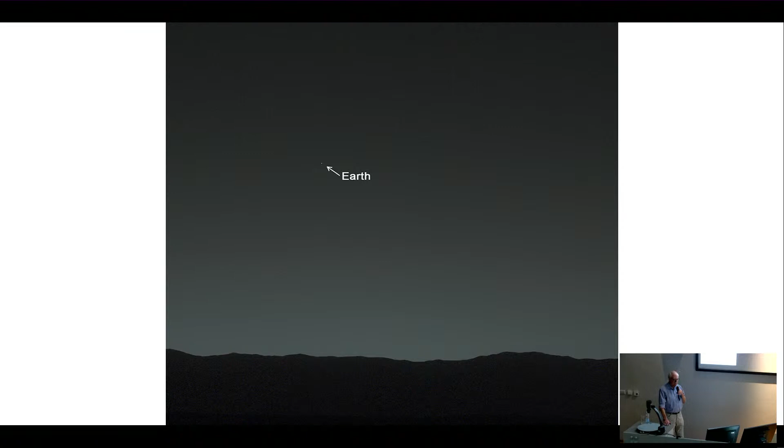We've discovered more than 5,000 exoplanets so far in different parts of the Milky Way. The nearest planetary system is 4 or 5 light years away, Proxima Centauri, and even if it had a habitable planet, we would never be able to get there except in several hundred years' time, because we simply don't have the ability to travel quickly enough. So we are absolutely alone, and if we mess up this planet and screw up its ecology, we have only ourselves to blame.

The last big climate crisis was the Ice Age, from about 115,000 to 11,700 BC, when the Earth cooled significantly, for reasons which aren't clearly known at this point. The general feeling is that it had something to do with a sudden release of carbon dioxide, which in fact had a contrary effect at that time in cooling the climate rather than heating it up. But the average global temperature during the Ice Age was about 8 degrees centigrade. Sea levels were 120 meters lower than today, which is a very difficult thing to conceive of, below the present average sea level.

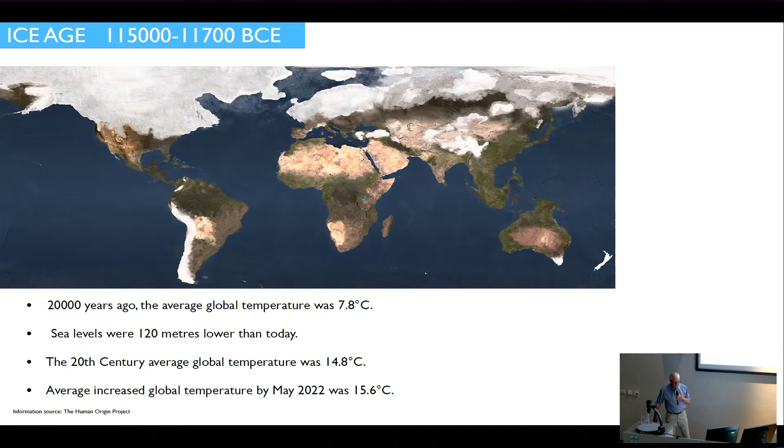The 20th century average global temperature was about 15 degrees centigrade, and average global temperature by May 2022 had climbed to 15.6 degrees centigrade. So if you look at the deltas between 14.8 and 15.6, and the 7.8 degree average temperature during the Ice Age, we are on track, I think, to disturbing the Earth's climate, if we carry on, to the sort of degree that will produce the kind of cataclysmic results that the Ice Age did, but with temperatures on the rise rather than on the fall. So the next climate crisis really is the one that we're faced with now.

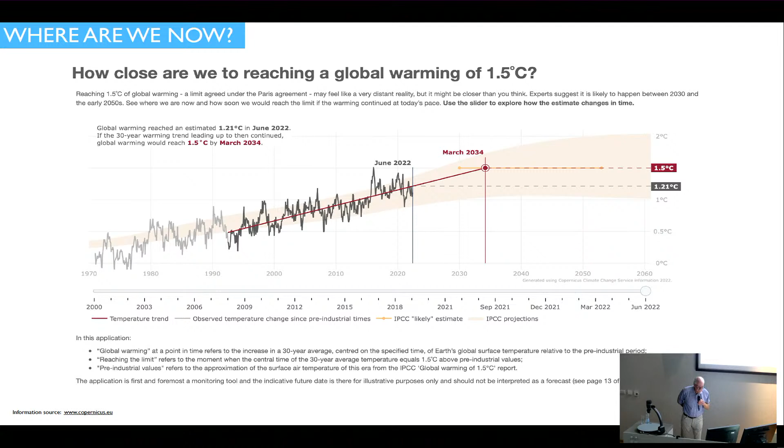How close are we to reaching the magic figure of 1.5 degrees centigrade, the apocalyptic figure? Well, in June this year, we had an average global temperature rise of 1.21 degrees centigrade, and the red line is 1.5, and we're creeping up each year. The prediction now is that as things stand, March 2034 is going to be the date that we reach that point.

Now, the program for dealing with this at a global level is being handled through the United Nations, the so-called COP conferences, and at the COP conference in Glasgow last year, around 200 nations signed up to increased climate action and greenhouse gas reduction targets, which followed the Paris Agreement of 2015, the world's first comprehensive climate consensus in which 195 nations agreed to take action. The Paris target was to hold the temperature rise to well below 2 degrees and preferably stop it at a 1.5 rise. Coal, the worst cause of global warming, is to be phased down rather than phased out, with the language weakened by India and no timeline given.

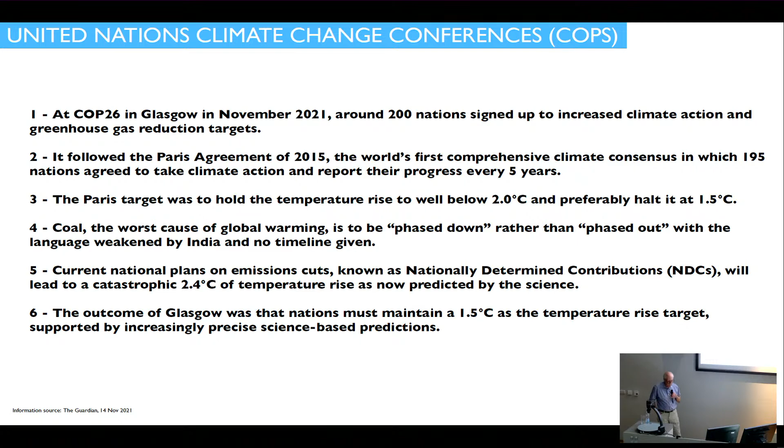Current national plans on emission cuts, known as nationally determined contributions, will lead to a catastrophic 2.4 degrees centigrade rise, as predicted now by the science. So the outcome was that nations must work towards the 1.5 degrees centigrade target. And the next COP takes place in Egypt, I think, next month. And so we'll see what happens there. So that's basically the situation.

What is the evidence for global warming and climate change? What is the evidence for sea level rises?

Well, this slide was taken by satellite about 10, 12 years ago, and first started getting me interested in the whole issue of sea level rises. And this shows part of the Ross Ice Shelf in Antarctica that broke away in 2000 to form the world's largest iceberg, which was 295 kilometers long by 37 kilometers wide and bigger than the island of Jamaica.

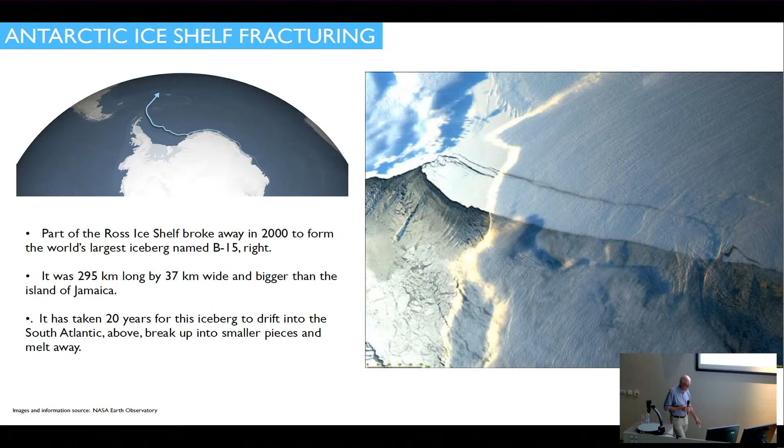And I thought to myself when I saw this photograph, my God, this is an incredibly serious situation that is beginning to take place, and nobody's paying much attention. So it took 20 years for this iceberg to drift into the South Atlantic, as you can see on the slide on the left here, up there, where it eventually broke up and melted into smaller pieces.

So these two photographs were taken in January and March this year, and they show a section of ice shelf in East Antarctica disintegrating. Those photos are roughly 110 kilometers across from side to side. And you can see here how this whole area of shelf has just disintegrated here too, and around here, breaking up into icebergs and ice floes and floating off into the Atlantic, and up here too. So in the space of just 2 to 3 months, that had happened earlier this year.

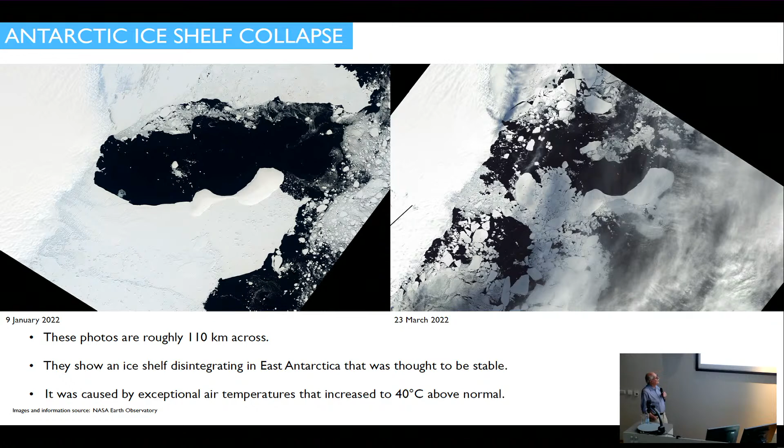It was caused by exceptional air temperatures that increased to 40 degrees above normal, and that was for Antarctica. A paper published in the magazine Nature in September 2020 points out that half the Earth's fresh water is contained in the Antarctic ice sheet. This represents the largest potential source for global sea level rise under future warming conditions.

The paper concludes that if the Paris Agreement to limit global warming to well below 2 degrees above pre-industrial temperatures is not met, critical melting thresholds may be crossed in Antarctica that may result in, quote, long-term, possibly irreversible sea level rise of up to dozens of meters.

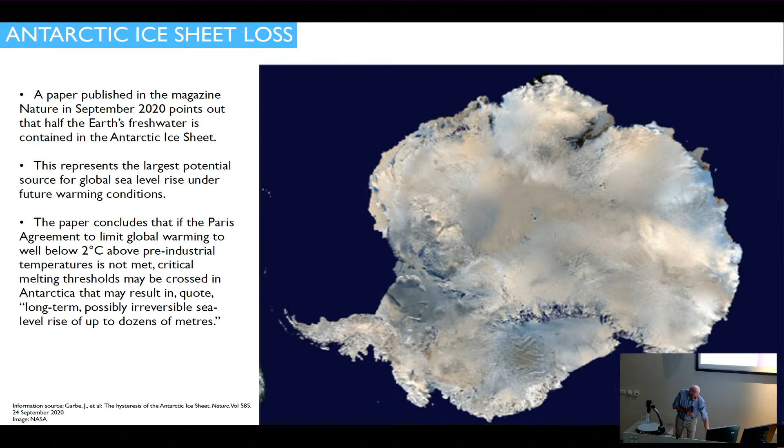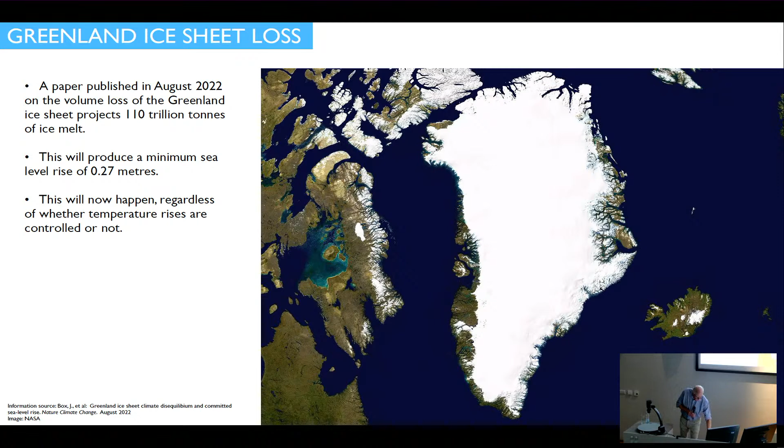A paper published just a couple of months ago on the volume of ice loss in Greenland projects 110 trillion tons of ice melt, producing a minimum sea level rise of 0.27 meters. This will now happen regardless of whether temperatures are controlled or not. Sea level rises in the United States. Expected average rise around the US coastline is now 0.25 to 0.3 meters up to 2050. Higher global temperatures may increase sea levels up to 2.2 meters by 2100 and up to 3.9 meters by 2150. It's hard to believe, isn't it?

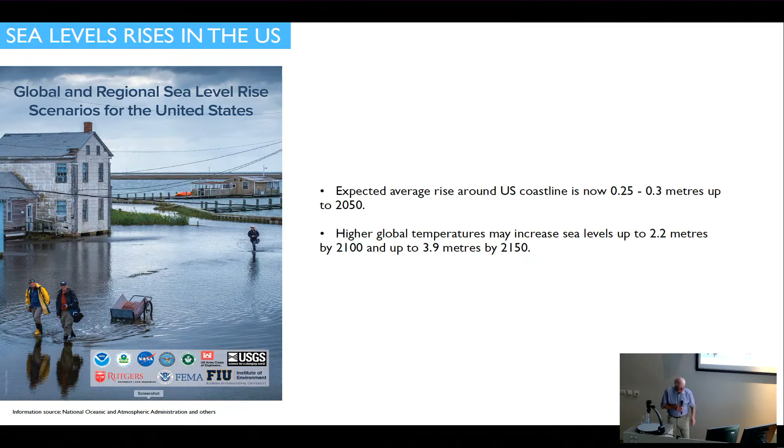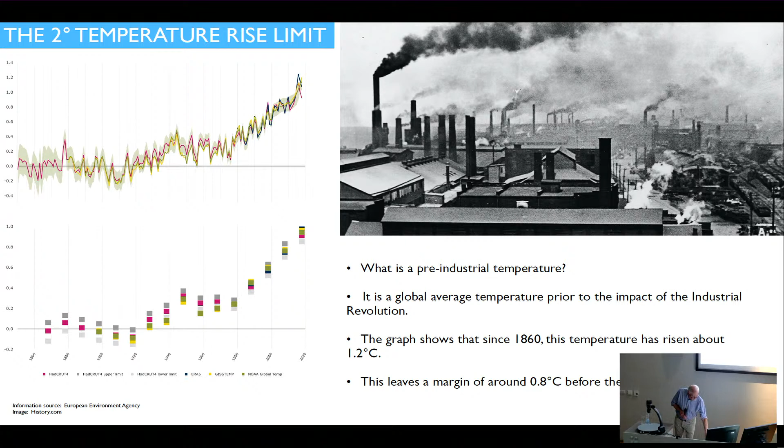So 1850 it started here, and then it started to rise in the early 1920s, 1930s, and is up here now with something like a 0.8 degree rise above the zero of 1860, of the late 1800s. So it's really a global average temperature prior to the impact of the Industrial Revolution. And the graph shows that since 1860, it's risen about 1.2 degrees, which leaves a margin of about 0.8 degrees before the 2 degree centigrade limit is reached.

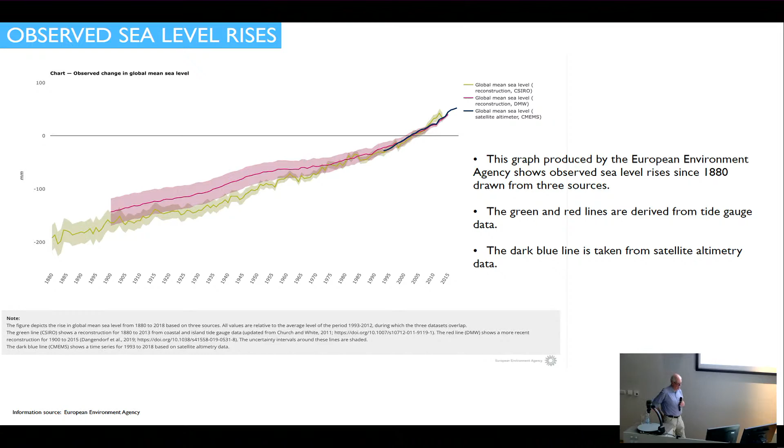And this graph shows observed sea level rises produced by the European Environment Agency since 1880, drawn from 3 sources. Green and red lines from tide gauge data, which they started using in the late 19th century. And then with the emergence of satellites, the blue line takes over towards the right. And that is showing, again, a major rise in observed sea levels.

Now, the causes of sea level rises, it's not just the issue of melting snow and ice, it's also the expansion of water in the seas and oceans, which expands in terms of volume slightly as it heats up. So you put those two things together, and those are the 2 sources which, when you add them together, give you the means by which you measure the sea level rises that are taking place.

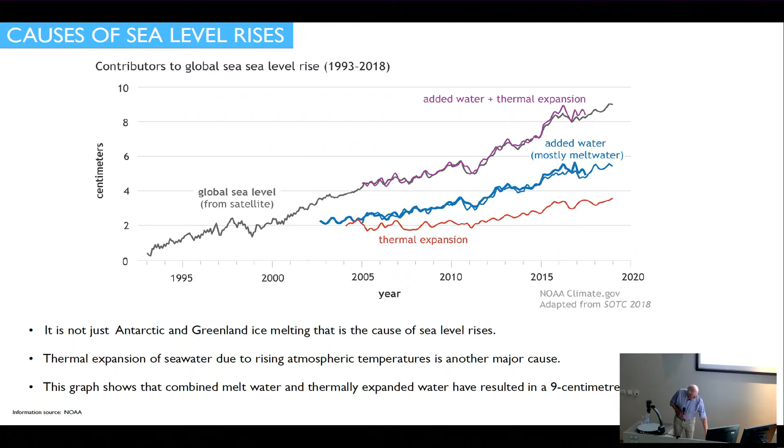And there's an interesting projection tool that NASA, the space agency, has now produced that you can go online to play around with, which will give you an idea of the risk factor of future cities on coastlines around the world. It's an interesting thing to do and rather alarming, actually, when you just start picking figures from this. So this tool shows projected rises for the decades up to 2150 based on different greenhouse gas emission rates.

Taking New York as an example, it shows a rise of 0.35 meters by 2050 and 0.93 meters by 2100. So you can get the picture, can't you, of how all this data is beginning to come in from these different sources now, and showing what is actually going to happen in the decades ahead.

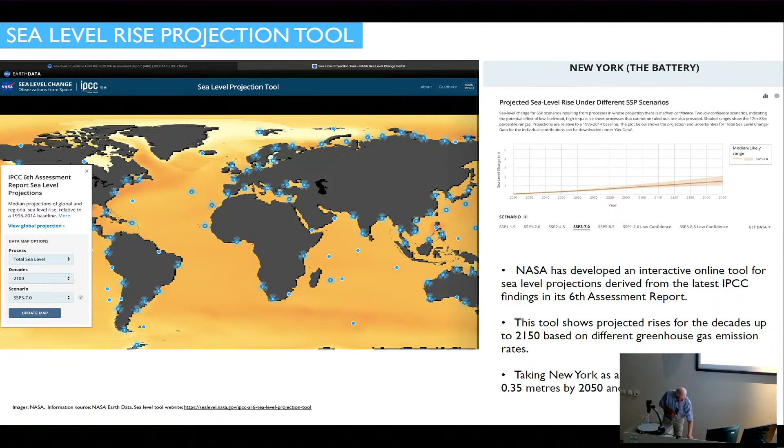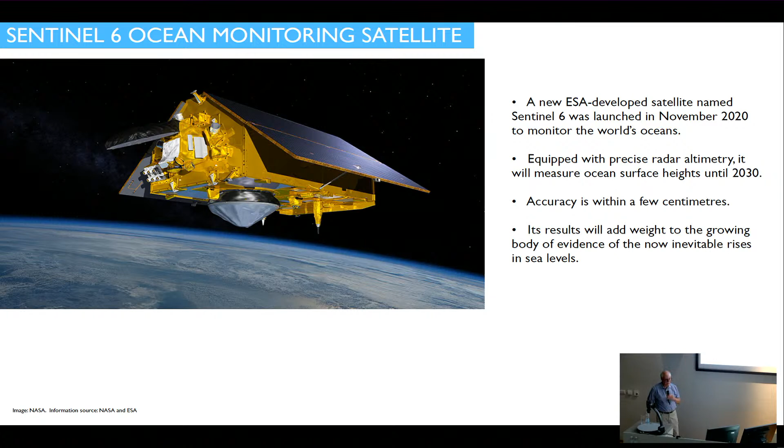And the most recent and accurate means of monitoring sea level rises is this satellite system, part of the Copernicus system. Europe has developed a new ESA-developed satellite launched in November 2020 to monitor the world's oceans, which monitors sea level accuracy to within a few centimeters. And its results will add weight to the growing body of evidence of the now inevitable sea level rises.

Right, so I've been talking so far about the evidence, what the evidence is behind the problem that is growing. So now I'm going to talk a little bit about what the challenge is and how we can deal with it. And one of the things I want to stress is that a lot of the approaches towards mitigating or solving the sea level rise involve design, architecture, and engineering.

And if there's one thing you could take away with you from this lecture when I finish today, it's the idea that when you train to be an architect, you don't necessarily have to build buildings on the ground. You can build buildings that float. And in future, this is going to be a big new opportunity field for architects.

So the United Nations has an organization called the Intergovernmental Panel on Climate Change, which is the world's leading authority on climate change, produces reports on a regular basis, and reports are informed by scientists around the world who carry out local observations, local research, local calculations. It's all pooled together, synthesized, processed, reviewed, and then published in reports.

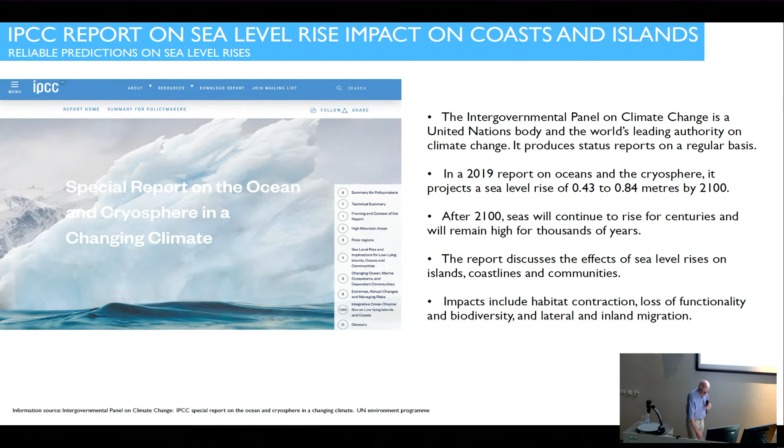Here, you build a monolithic water barrier of some sort, a breakwater, in front of the development, and hope that that will keep the seas back from the development that you already have. Very expensive, time-consuming solution. The third one is protection, which is essentially a smaller version of what I've just mentioned, where you build a seawall without any development on it, a simple seawall to hold back the water.

The fourth one is retreat, where in fact you take your development, if you can, existing development, and rebuild it or move it to higher ground that is well away from any risk of future flooding from the seas.

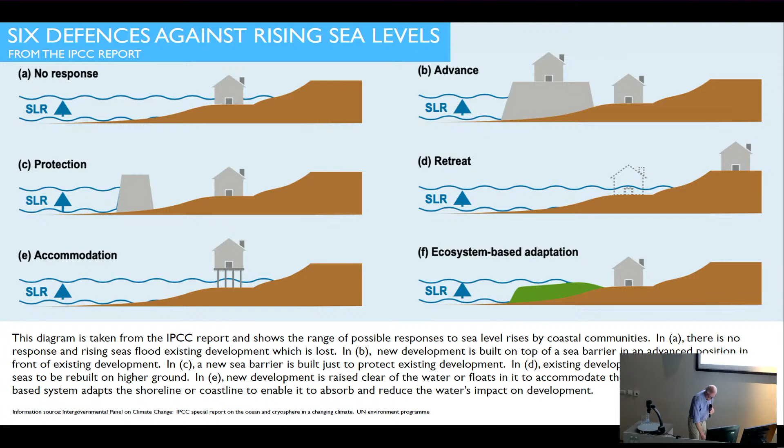And then of course you've got a synthesis of all these different approaches. You can have different combinations to tackle specific situations, particular geographical situations which don't necessarily suit one particular approach. So let's look at these in turn. The first one is no response. So this is an example of no response.

Malibu in California, which is the home of the film stars, on the California coast. As you can see here, it's a ribbon of development stretching along a very exposed part of the coast. It's very low level here, and this is what's happening now already. These homes are basically stick-built wood-framed homes sitting on wood piles that go down on foundations, and you can see high tides already beginning to sweep the base of the steps.

So older coastal residential sites like this one, which was built from the 1920s onwards, are going to be swallowed up by the sea unless the owners can redesign their homes to survive rising sea levels. Well, here you're dealing with film stars with vast financial resources, so maybe they will do that, and time will tell, or maybe they will desert the waterfront and go and build somewhere else higher up. But in a situation where nothing happens, that is typical of a no response.

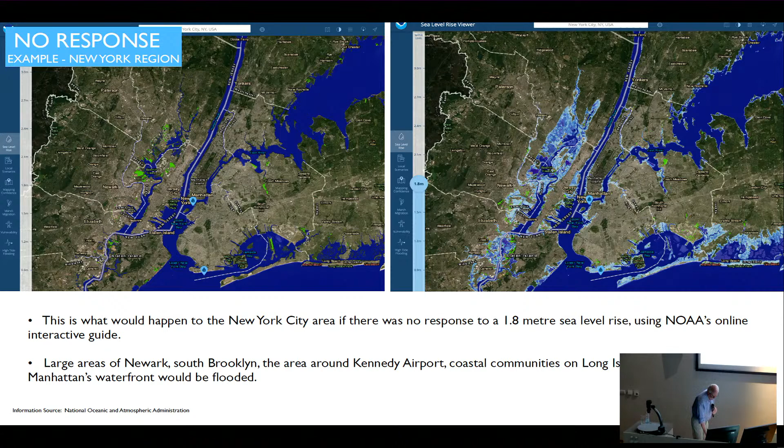This is what would happen in New York if there was no response. You can see the flooded areas, the light blue areas on the right. This is what New York would look like with a 1.8 meter sea level rise using the interactive guide I mentioned before, where large portions of Newark, New Jersey, here on the left, the Manhattan waterfront around here, and the area here, Brooklyn, and particularly the John F. Kennedy Airport strip here would all be seriously affected. And New York does have a plan in action that they have begun to try to address this in the future, and I'm going to show a slide from that in a minute.

The next one is advance, where you go out into the water with some kind of structure, reclaimed land, or whatever it happens to be, on which you build something of use. This is an example of an airport, Kansai Airport in Japan, which was designed by the Renzo Piano office, built on reclaimed land. Since it opened in 1994, the airport ground has sunk 11.5 meters from the original level. Now, this was predicted by the engineers over a 50-year period before stabilizing at 4 meters. They knew that there was going to be major settlement on that site.

But parts of this airport construction have reached that threshold in just 6 years, which required the construction of a perimeter wall all the way around the main airport area to protect the runways and the buildings. So who knows? That wall is apparently keeping out the highest tides at the moment, but with rising sea levels, one doesn't know what is going to happen.

So this is a project that I was involved with in the mid-1970s, also with Jan Kaplicky and Eva Jiricna. All of us were working for the architect developing this project at the time, which was a very large marina built out into the English Channel from the coastline of the south of England.

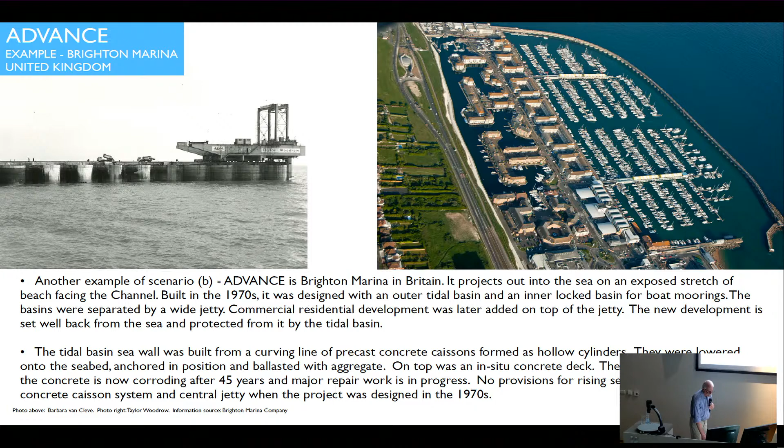So reinforced concrete, apart from the sheer cost of it, is not necessarily, or maybe not even at all, the long-term solution for what the United Nations call advanced barriers of considerable size on which you want to build something.

So the next category is protect, and the example I've used here is the sea wall that protects Cherbourg Harbour on the north coast of France, which began construction under Louis XVI in the late 18th century. It was interrupted several times by the removal of the Ancien Regime, the fall of the monarchy, the French Revolution, and then the Napoleonic Empire that lasted until around about 1815. And through all that, they pressed on with this project.

And there's a section here from one of the original reports that I will try and describe. Again, it was an extremely exposed site on the north coast of France, sticking out into the English Channel. So they started with a system of rocks, just loosely deposited rocks, on the seaside on one side, with a fairly gradual slope, and then a steep slope on the other. The idea being the rocks would, again, slowly reduce the force of the waves before the waves reached the top of the barrier and spilled over to the inside.

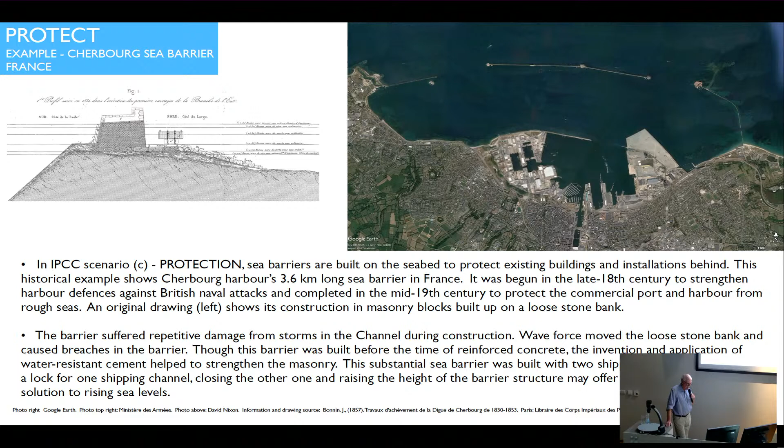But compare this to the project we've just seen with reinforced concrete. There is no doubt that simple masonry, cleverly deposited with a minimum of additional manufactured materials using locally quarried stone, is far better at resisting the sea in the long term than reinforced concrete. So that's an important lesson for the future.

This is the Thames Barrier in London, which was built from 1975 to 1982. Engineering performance data was based on predicted high flood tides, 100-year floods up to 2030, but did not consider any future sea level rises.

And what they're finding now is that they have to raise the barriers between the structures, submerged barriers, more and more frequently to prevent high tides from passing up the Thames to central London, particularly during winter at high spring tides driven by North Sea winds. When you get a high tide with the wind forcing it up the River Thames, that's the most risky time.

I remember some years ago, I was sitting in a pub in South London on the river called the Mayflower, very historic pub, having lunch, and one of these high tides came in, and the floor of the bar was next to a terrace which was built out over the water down into the riverbed.

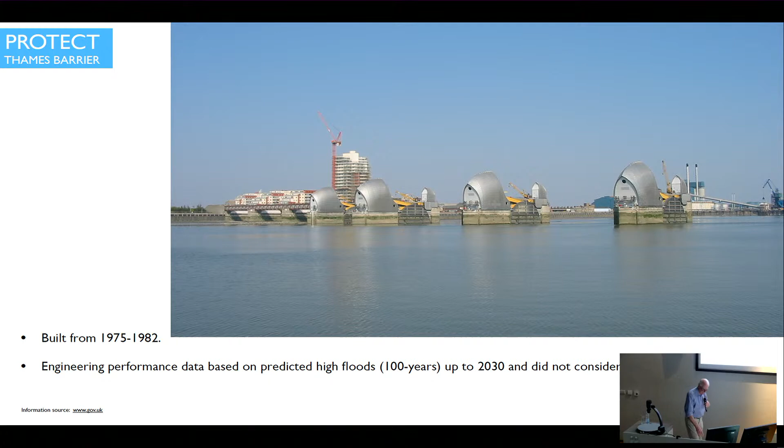And I was sitting there drinking my beer. The water appeared over the top of the terrace deck and started seeping into the bar across the floor. And I thought to myself, it's going to be like this every week in the future in this particular pub.

Here's another example of Protect. This is a town on the south coast of Britain that suffered very severe storm damage, which washed away a section of retaining wall at the back of the sand and also washed away the aggregate and rocks beneath two railway lines that fed the whole coastal communities along the Devonshire coast. And this is what happened.

And 2 years later, they had rebuilt that with a fairly standard reinforced concrete wall sitting on a deep footing well below the sand. So we'll see whether that survives or not.

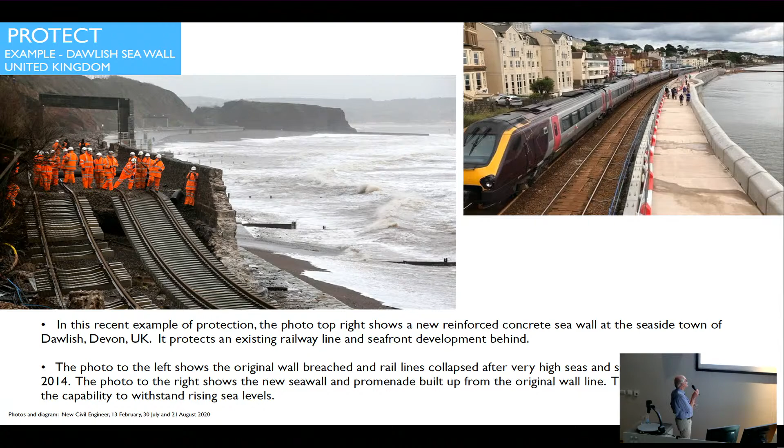So the real masters of dealing with the sea, I think, are the Dutch, it's fair to say, historically and certainly today. The Netherlands has devised all kinds of techniques for protecting its very low terrain affected by floods from the North Sea. And the biggest construction is this one, the Oosterscheldekering, here on the left. An amazing piece of engineering.

I haven't actually visited it, but it is very impressive with, again, a series of barriers with movable gates which are deployed during high tides, 9 kilometers long, of which 3 kilometers comprises the movable gates. So the barrier is closed once a year on average when the sea level is predicted to rise to 3 meters above what they call their local normal Amsterdam level.

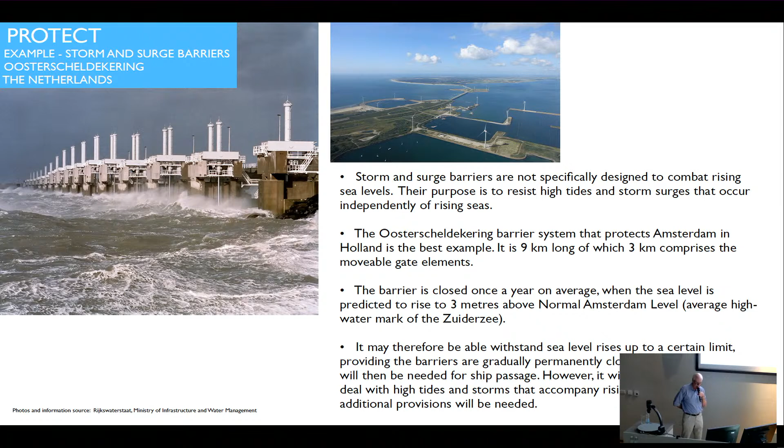So it may be able to withstand sea level rises up to a certain limit. There is enough margin there, providing the barriers are gradually permanently closed. A system of locks will then be needed for ship passage. If the barriers have to be closed most of the time, ships can't get through, so then you introduce a lock passage or a couple of them. But whether it can deal with high tides and storms that accompany rising sea levels 50 years from now, nobody knows.

And then, of course, you've got the famous example in Venice, the MOSE Lagoon Barrier project in Venice, to protect the lagoon from high tides and storm surges in the Adriatic. This project was very heavily delayed by technical, political and management problems, eventually completed in 2020, and has now proved that it works well after holding back flooding 2 years ago.

So the barrier compartments work on the same principle as ballast tanks in submarines. That is to say, they're fully flooded when the barrier is submerged on the seabed, and when the sea level rises, you pump air into the compartments to purge the water, blow the tanks, and up they come. Very simple concept. And maybe that's one of the major solutions to sea level rises and tidal rises in the future.

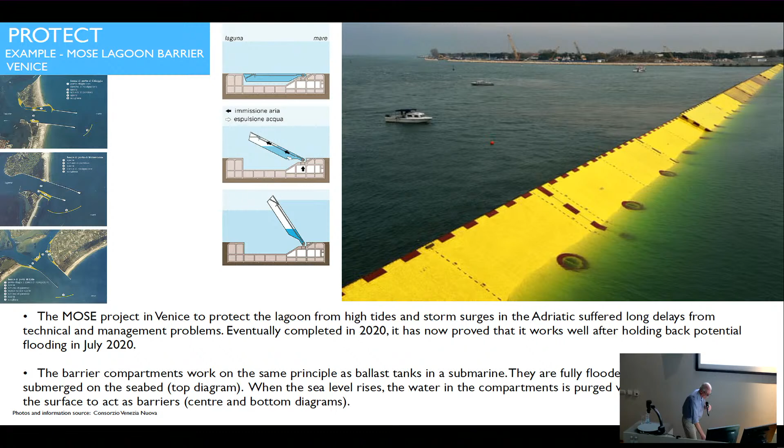We'll have to see. You see what I mean about the design input that is such an important aspect of some of these ideas. This is a perfect example of it. And there's no reason at all why architects can't get involved in leading projects like this.

So the next category is retreat, where you give up essentially living on the coastline that is now being flooded on a regular basis, and you move all the development further inland. And this is an example from Japan, from the city of Higashimatsushima. I hope I've pronounced that right.

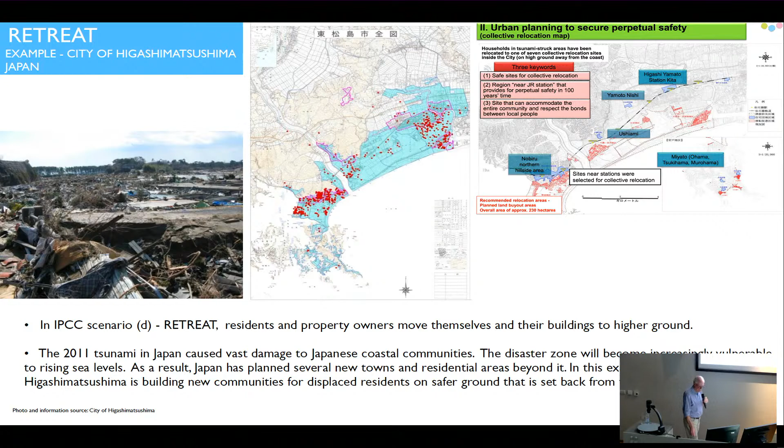There was a bad tsunami there in 2011 that caused a huge amount of damage to this stretch of coast, and the cities affected planned several new towns and residential areas beyond it. You can see what they've done. The blue were the flooded areas from the tsunami. A lot of the existing coastal communities were flooded out, which is the red development. And what the local planning authorities have done now is to rehouse a lot of the former residential communities in sort of higher density areas further back from the coastline. So that's an example of retreat.

What happened is, in the 1950s, the American military did a lot of their nuclear bomb testing on some of these atolls in the Marshall Islands in return for this future commitment to support and sustain the population of the islands should some disaster like rising sea levels happen. So this may end up as being one of the first examples of a complete relocation of a nation from one part of the planet to another, because the part they were living in before has become completely uninhabitable.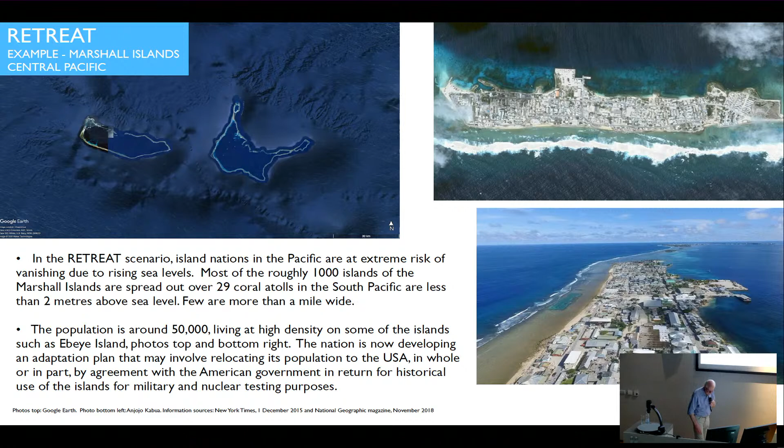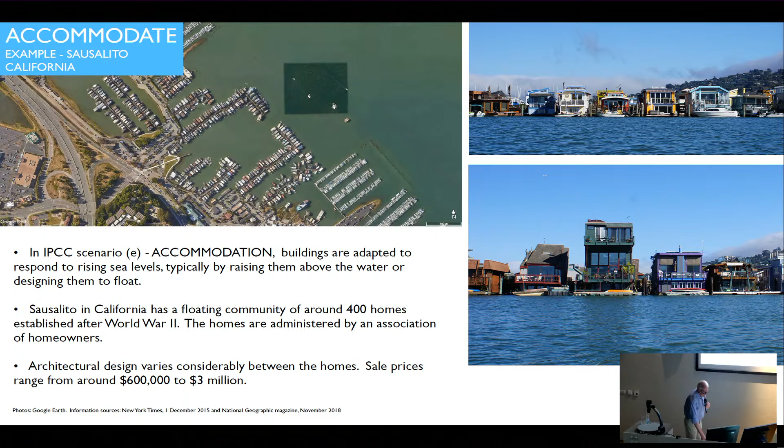Of course, it's fair to say that the stretch of water on that side of San Francisco Bay is very calm. It's quite sheltered. San Francisco Bay generally is fairly calm. Only in the most extreme weather conditions in winter do you get waves building up inside the Bay Area, coming in underneath the Golden Gate Bridge. So that's a historical example of accommodation of not sea level rises, but floating homes on the sea.

A much more recent one is this one in the Netherlands by the Dutch firm of Marlies Rohmer. As you can see, basically it's a fairly modernist housing development floating on the water rather than sitting on foundations on the land, and supported on what looks like a fairly lightweight, maybe timber-built substructure. So they're prefabricated in a factory, towed to the site by tugboats, moored in position along floating walkways and connected up to public utilities lines.

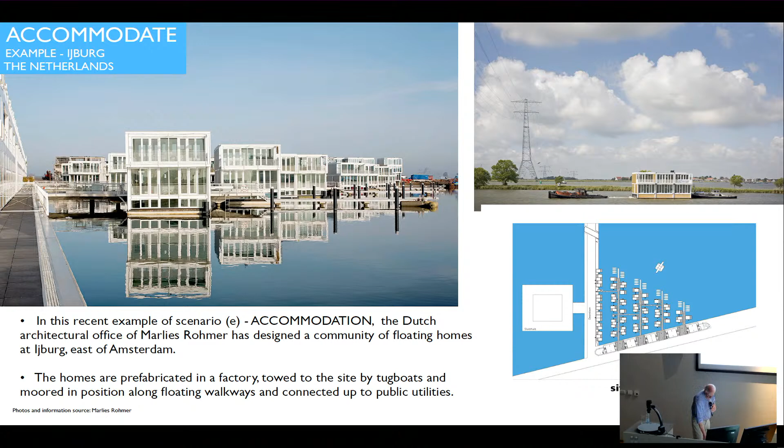Another example from the Netherlands is this one in Maasbommel. This is slightly different because this is an amphibious design in which the homes actually rise up and down with the tide, guided on piles. You can see a pile here in the middle.

This is taken at low tide with the substructure of the home sitting on I don't know what that is under there. Maybe it's a concrete bed of some kind, or a compacted gravel bed. Sitting on here and then rising up twice a day, whatever it is, with the tidal increase.

And that's going to be the first challenge, because sea level rises are going to be a very gradual thing. And the first thing that is going to happen is that homes, buildings along the sea fronts in affected areas are going to be affected by seawater coming in intermittently at high tide, and then the water will flood out at low tide.

So from an architectural and engineering standpoint, what you're going to start off with are homes that can rise up and fall twice every 24 hours, quite happily, with the utilities connections articulated and hinged to enable that to happen. You know, it's not rocket science, it's a very simple thing. And what we need to do as architects is just to switch our minds to the whole idea that we're building on a liquid rather than a solid foundation.

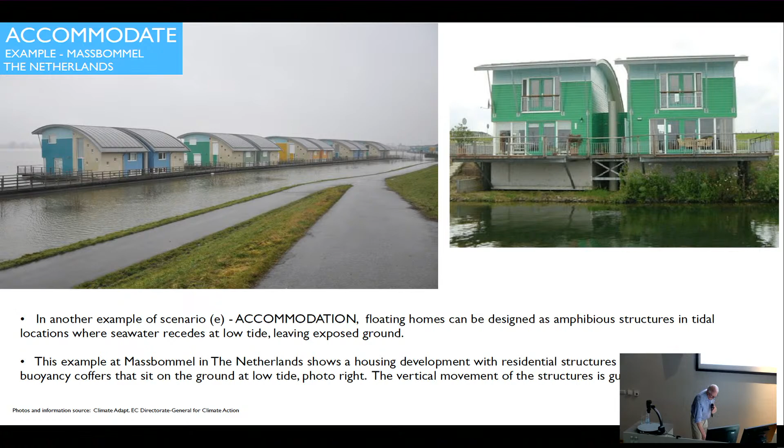So the final category is to ecologically adapt. And this perhaps is truly the greenest approach, where you're trying to use natural vegetation and plants in their local habitats to do the job of mitigating the force of the sea. You can't really use these for reducing sea levels, but you can certainly attenuate the wave motion and calm it down, so that by the time the water does get to development on the inside, it will be much calmer to deal with. It's a case of using more than one technology, more than one approach.

So you could use an ecological adaptation approach as a front line, and then by the time the water hits your amphibious structures in the previous slide, it's calm all the time. And so that eases the design of the floating structure that you're going to build, and reduces the motion of the house caused by the wave action.

So mangroves are very effective. Mangroves grow in tropical and subtropical latitudes. They put down their own roots into the sea or riverbed, mostly effective in what they call brackish water areas between fresh water and seawater, such as estuaries of rivers like the Mississippi River in the United States, or the Everglades in Florida, somewhere like that.

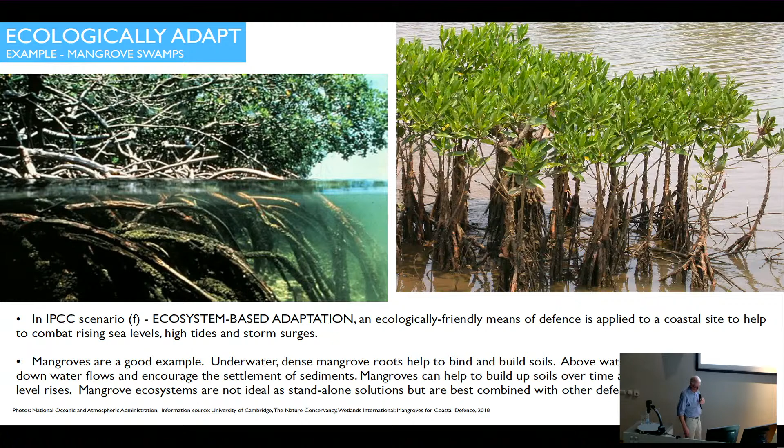So underwater dense mangroves can help to bind the soil and stop the soil erosion caused by wave action, and slow the water down. If you slow the water down, that's the first thing to do. Build up the soils over time. The mangroves contribute towards fish life and the preservation of ecology, aquaculture in the seas, and as they degrade and decay, they continue to reinforce the soil underwater. So it's a self-regenerating process, best combined with other defensive measures.

Another example of wetlands and marshes. These photos are taken from Louisiana, which faces the Gulf of Mexico. Louisiana is very low in the water. You see that slide on the left there shows a series of tidal islands or flats, which are at low tide there and would be submerged at high tide.

So in Louisiana, there were two major hurricanes that caused immense damage and loss of life in 2005, one called Rita and the other called Katrina. And that affected New Orleans in particular, causing the state of Louisiana to begin a program of wetlands restoration and expansion. So Louisiana is taking the natural approach. Strategic conversion of around 1% of the agricultural cropland to wetland, providing flood resiliency for local communities.

So you convert excess cropland, farmland, to wetland, and that allows the higher water to come into the land and be absorbed by the new soil. But as with mangroves, it's not a standalone solution. It has to be used with something else.

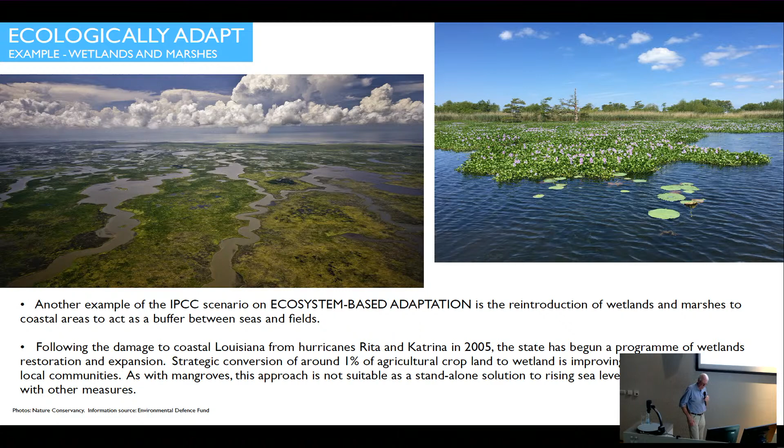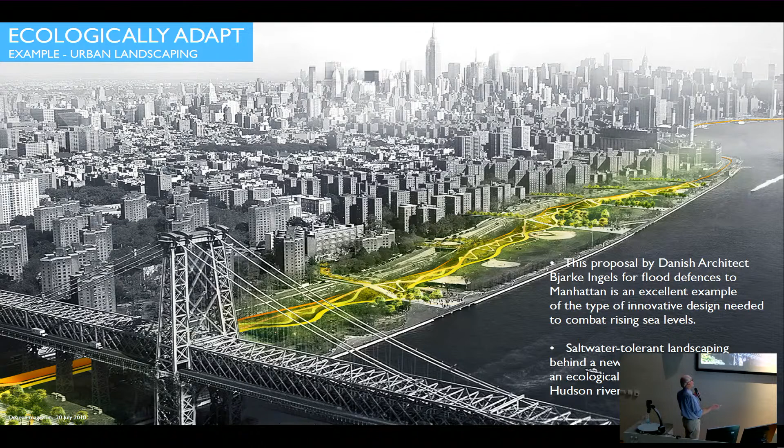And as you can see, 4 or 5 of those involve design, 4 or 5 of those involve architecture potentially. So it's a new field. This is the new field that is opening up for us.

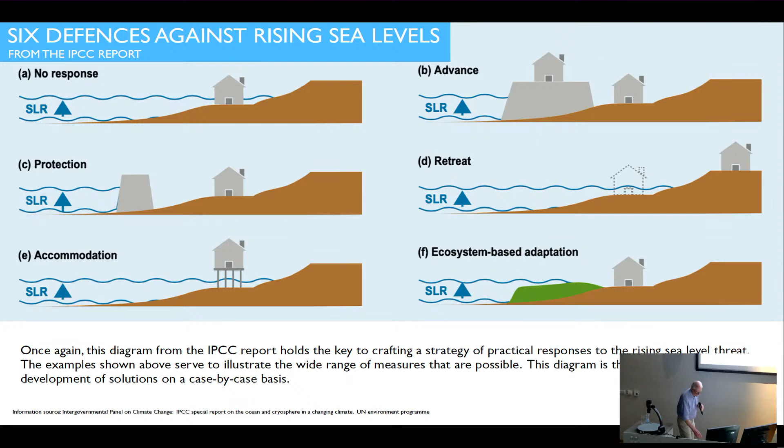So, just talking for a moment about Europe. The challenge for Europe is that it's got a huge coastline, 58,000 kilometers long, apparently, stretching all the way from Finland, round the Baltic, out into the English Channel, North Sea, down past the coast of France, round Spain into the Mediterranean, all the way down. There's the Aegean and Greece and all the rest of it. Can you believe that? 58,000 kilometers long coastline, 3 times the length of America's and twice the length of Russia's.

So planning a pan-European response to the sea level threat must begin now. Countermeasures should be funded and managed by the European Union through a phased-in budget established for the purpose, I believe. This would ensure that low-lying nations and regions most at risk are not left to survive and adapt without pan-European help. European Union countries without coastlines should help those with.

If you are part of the problem, you have to be part of the solution, right? And here in the Czech Republic, you're burning a lot of coal in power stations, right? So you're part of the problem. You're a big part of the problem. So the thing is that Europe has the structure of government and the structure of regional organization that is the perfect vehicle for enabling a common cohesive approach to take place.

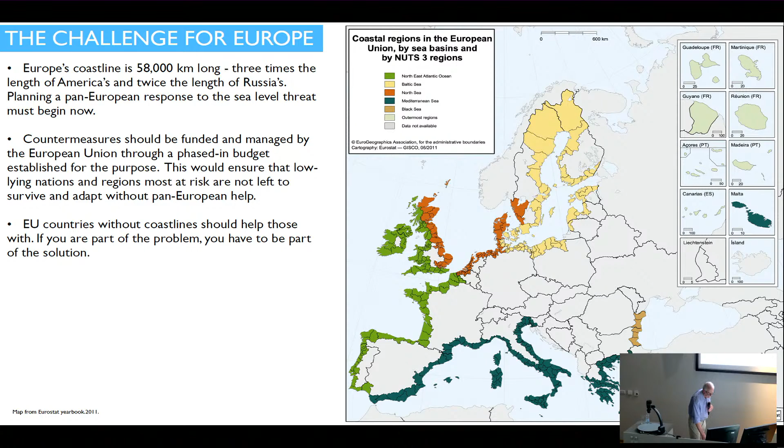Now, this is only beginning to impinge on European thinking at the moment, and I've been through the documents of the European Union dealing with the environment, the European Environment Agency it's called, and they are barely beginning to tackle this situation. So we need new ideas, and just finishing up with 2 examples from my own interest really. This is how they do it in Venice, right?

Every time they have a flood, they come out with these things that look like outdoor restaurant tables on legs. And this is St. Mark's Square. Put them down in a line, incredibly unsafe, dangerous, slippery, you know, risk of children falling in, absolutely hopeless in many ways, difficult to install one by one across stretches of water. Right? So about 10 years ago, I thought, well, maybe I should get involved in this subject.

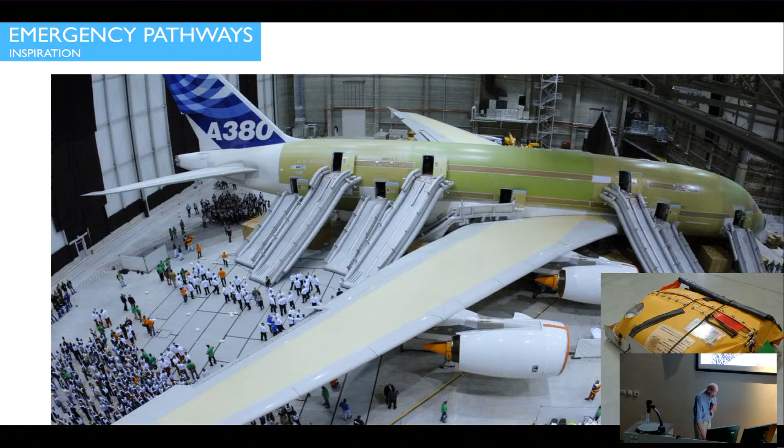And the first thing I thought of was really what they do in aircraft for emergency evacuation using inflatable evacuation slides like these examples from the A380, which self-inflate over the wing or straight out of the fuselage down into the water. And I thought maybe there's something there that could be adapted to a similar sort of self-deploying situation. So I came up with this idea. There's really nothing new about it. It's basically an updated version of a pontoon bridge. Pontoon bridges go back to, I don't know, medieval times, I think, maybe earlier.

Pontoon bridges basically are walkable or drivable decks, cyclable decks that sit on boat hulls or tubes of various kinds, be they metal, solid, or in this case inflated. So I came up with this idea, which is a containerized approach where you have the thing sized to fit inside a shipping container, right?

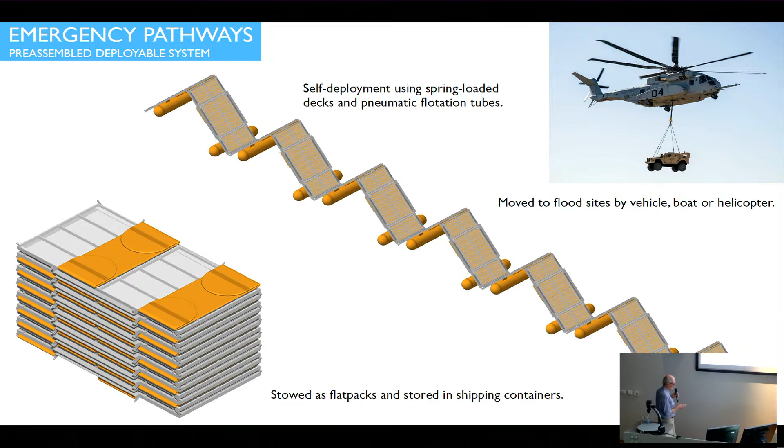So two of them in one 13-meter container. And then out it comes on the water, and you press a switch, or you get your iPhone, your iPad, and you signal the actuators to deploy springs to extend the thing out of the water as the tubes inflate, and you end up with a walkway that looks like that.

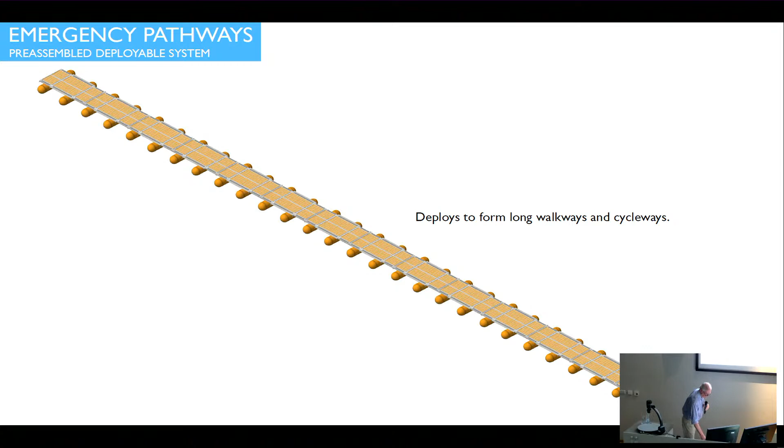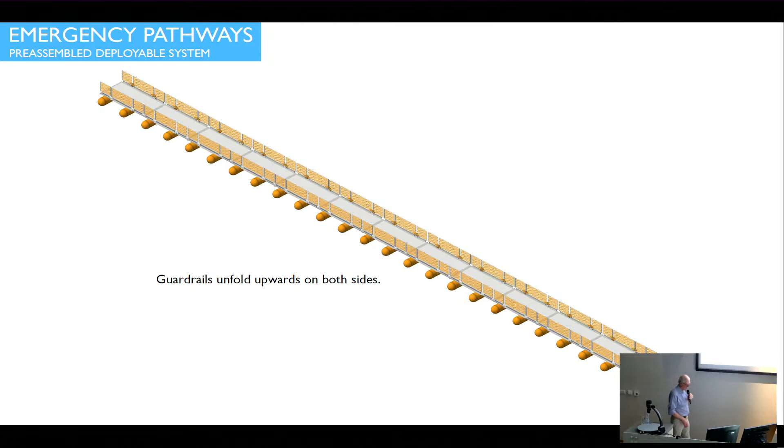But that's not all, because the walkway is fitted with guardrails which flip up from the sides of the walkway like that. There's nothing special about this. It's just basic, trying to produce a design which is easily deployable, self-deployable. Those would have to be done by hand probably after the main lengths have inflated. And then you take some sections out and you can start to build an infrastructure at 90 degrees through very simple joints that connect the sections at right angles.

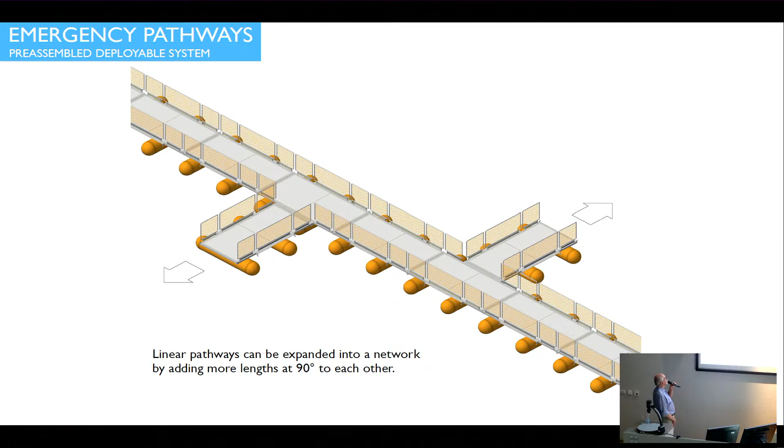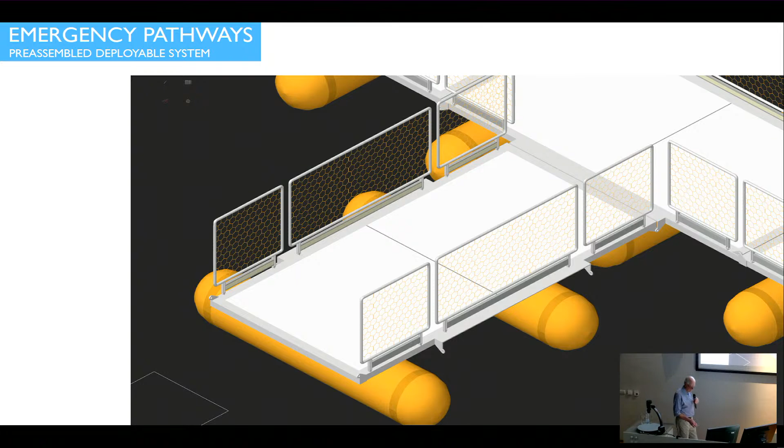And that's a detail, and you have sort of high-strength netting for the sides. Very lightweight, very strong, very simple. So that's just one idea I came up with, I don't know, 12 years ago, I think it was, and then forgot about it.

And then recently, I wanted to talk to you about the final example tonight, which is Tuvalu, which is another very high-risk island in the Pacific, which consists of 3 reef islands and 6 atolls, the total land area of 26 square kilometers and a population of 12,000. Maximum elevation 4.6 meters above average sea level, and an average lagoon depth of 36 meters, which really makes the lagoon in the middle, as we'll see in a moment, too deep for construction.

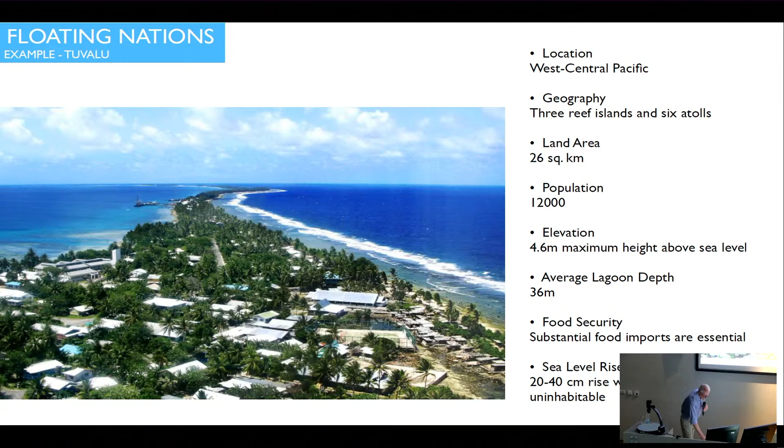Food security, well, it basically doesn't have any now. Substantial food imports are essential to keep the island going. So they now predict that 20 to 40 centimeter rise will make the islands uninhabitable. And as we've seen earlier in some of the evidence slides that I talked about at the beginning, that 20 to 40 centimeters is right on the cards now. So this nation is going to disappear unless somebody does something about it.

The figures are of the order of 1 hectare per person. For the amount of land needed to grow crops of cereals, fruit and vegetables needed to sustain 1 person with some animal use, such as chickens, no major animals like cows, 1 hectare per person. So 12,000 times 1 hectare gives you all those green circles. I've just used circles to illustrate the point.

I'm not suggesting they should be designed as circles, with the population in the middle of the circles, so that you have, in fact, 2 levels of protection. So first of all, as the sea levels rise, you use the old lagoon islands as breakwaters to attenuate and reduce the wave action from the Pacific. And then secondly, the water impacts the areas of growth of plants. So you have floating fields.

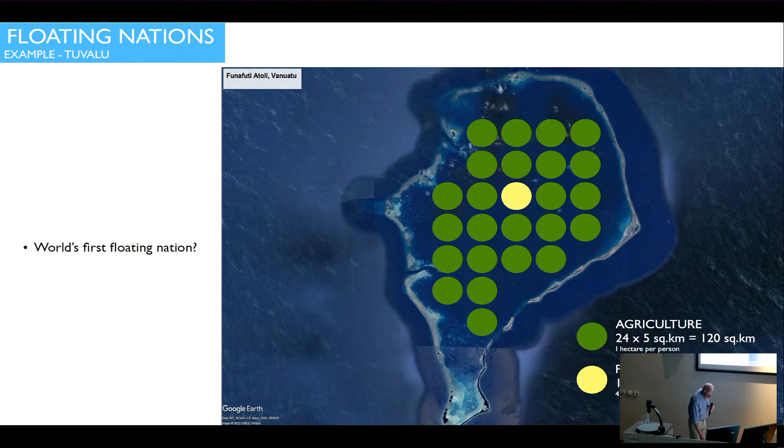Those floating fields have to be designed to withstand both wave motion and also overtopping around the edge from waves hitting the structure. And then you put the accommodation right in the middle, where it has the most protection from both the now submerged islands, which are acting as breakwaters, and also the floating fields. So that is just a very outline idea about how you could do it.

But it's not just Pacific or seas or oceans that can benefit. I mean, these photographs are 3 examples of catastrophic floods this year in Pakistan, Bangladesh, and Nigeria, where residential communities have lost everything. They've lost their homes, they've lost their agriculture. These are primarily agricultural communities. They've lost their livelihood. So something needs to be done about designing floating fields.

And so just as a slightly crazy idea, I came up with this. It's basically a floating carpet which is designed to be buoyant and create a series of plant trenches between the pillows which are buoyant, and that these could be built, one hopes, fairly cheaply and floated into place and then planted out. And that's typically the structure. Essentially it's like bubble wrap that you use to wrap packages in before sending them off. It's really like giant bubble wrap.

Right? Huge pillows of air connected together in such a way that the series of grid lines form the furrows, if you like, or the lines which you build up with soil and then grow your plants on that. It has to be designed to take the swell of the ocean so it's flexible in every direction. Very simple concept, we've got the weight of the thing being balanced by the water displacement, and then you have a reserve. Very simple calculation. And then you have some kind of edge detail to stop the swell spilling into the plant areas, which you don't want. So that's a half-hour idea from about a couple of weeks ago.

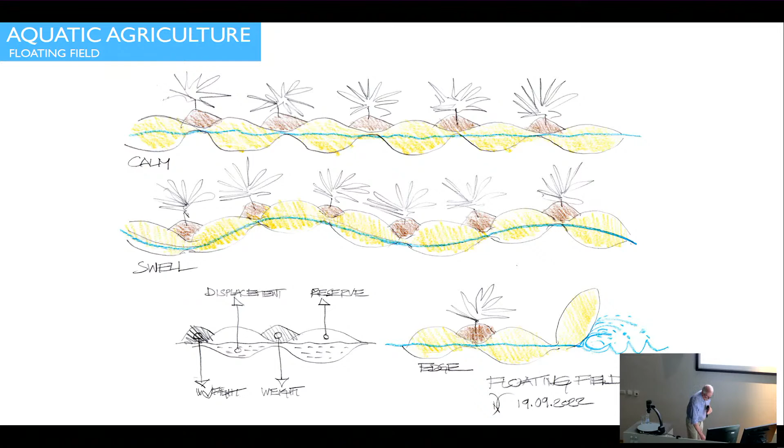So I just threw that in to show you, really, the sort of things that architects can dream up, really as alternatives, using their design abilities to approach the problems from a completely different standpoint than has been used up to this point, and go forward with completely innovative ideas which can be put into practice, developed as prototypes very quickly.

You can go actually straight from this sketch to a prototype about the size of this room and put it on a lake or a river somewhere and see if it works. And forget, you know, a major design and engineering effort. Just do it. This is the sort of thing that needs to be got underway.

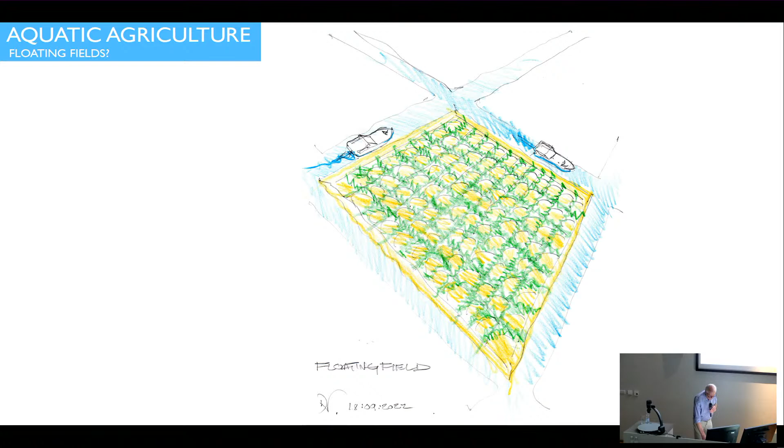So, conclusions for architects and engineers, just to sum up. Countermeasures against sea level rises must solve two problems at the same time. First, they must respond to and combat rising sea levels as they happen. But secondly, they must focus on construction methodologies that achieve carbon negative or at least carbon neutral footprints. And that means not pouring vast quantities of concrete into the sea and hoping that that will solve the problem.

Sea barriers and sea walls should be built vertically in phases, synchronized with sea level rises over the century ahead. In other words, don't go and build a huge structure 10 meters high, the height of this room, to begin with, if you don't know what the future is going to be. You design it in such a way that you can increase it incrementally, like building a Lego set, right? Building a wall out of Lego.

And that will help to reduce the initial costs and spread the total cost burden over several decades, which makes it a much more acceptable thing to do politically and financially and economically to begin with. Floating homes can be a major part of the solution. They can make use of three sources of natural energy: sun, wind, and tide. Properly designed, these three sources, working individually and together, can provide all the energy needs of waterborne development.

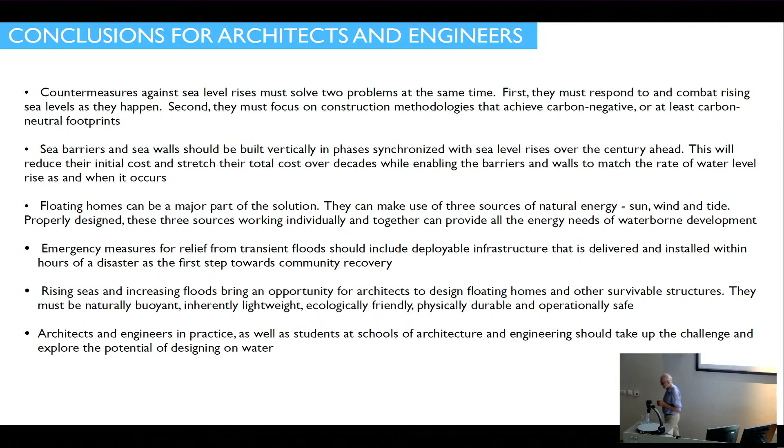Ask a question. Yes. Do you want this?

Well, in the case of the UK, I don't live in the UK anymore, but I do follow what goes on there. There isn't one. There simply isn't an approach, and this is part of the problem. And I was saying earlier that the issue is just coming onto the radar of governments now. So if you look at the state of Florida, where you have Miami, a big town that is now being flooded on a regular basis, the state government is beginning to take action through remedial measures for that state, which has a very large coastline.

So it's being handled in bits and pieces around the world at the moment. Where you've got a problem that's emerging, local communities try to do something about it, or not, as the case may be. And local governments have to get involved because it becomes a political issue, if homeowners start to lose very expensive homes in places like Miami, or insurance companies are refusing to reinsure homes because of the risk. So they turn to the local government and say, what are you going to do for us?